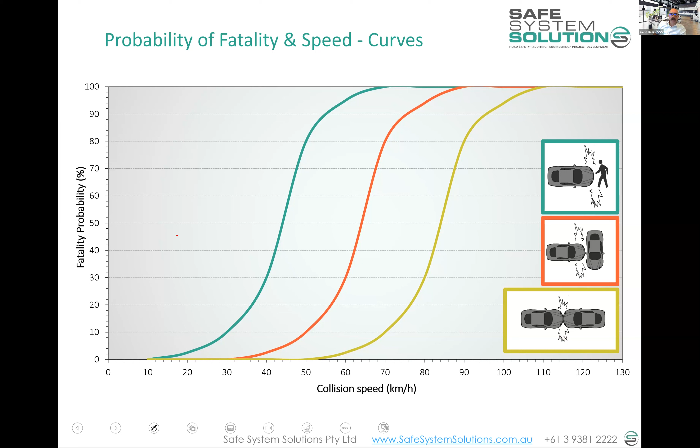And in terms of the severity of injury, the outcome, exposure, likelihood, and its severity, we look at these biomechanics of injury curves at different speeds. We got some good detail around that. We talked about that 10% line as a sort of threshold way of thinking. But I did point you at this, and I'll be pointing you at this again: the severity scoring guidance sheet, generally giving you guidance on how severe an outcome we might expect from a crash between specific road users at specific speeds, bullet vehicle speeds.

And that's what we generally feel. It is very much a graded, shaded thing, because it's not like a very distinct line that you would say, oh, no, it's ticked over that line. It's very much going to be a serious injury or the like. Some will be serious injury, some will be minor injury, some will be fatal. But we know this is a general gauge for what we're expecting. And so we'll be coming back to use this when we go to score the severity of crashes.

Okay, so how do we actually do this safe system assessment?

A little bit of a spot poll just to see where this group is at with safe system assessing. I don't know, Loretta, if you want me to pop that up, or you've got that there? I can, if you pop it on. I haven't got that one ready to go. That's all right, we are in module 3 or 4, I think 4. Here we go, launching that.

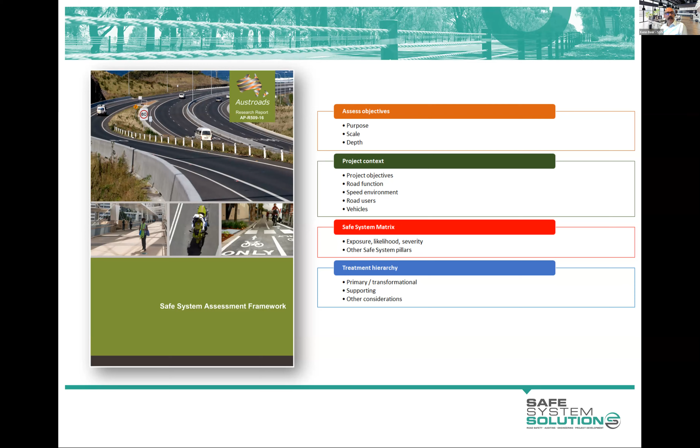But since the Austroads Safe System Assessment Framework was released, the jurisdictions started doing safe system assessments, and people were out there doing them.

They were finding a few little things in the Austroads guidance document that didn't quite work, for one reason or another. That's understandable, because when Austroads released that, nobody had really been doing any of these. So the jurisdictions created supplements or their own guidelines that reference back to the Austroads guide. Victoria's released one, South Australia's released one, and that one over here is the New Zealand Safe System Audit Guidelines.

They've combined safe system assessments and road safety audits into one methodology. So what I'll be talking you through today is the way that industry practices safe system assessments. It's almost exactly what's in the Austroads document, however there are a couple of little bits that are maybe a little bit different.

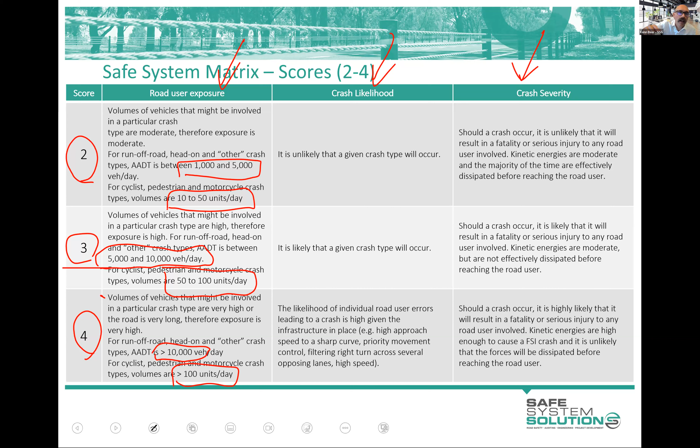Okay, that was the one. We said it was 3,000 vehicles a day. 3,000 sits between 1,000 and 5,000. So let's go back here. And what would we say? A 2. So we're able to put a 2 in there.

Now we've got a question that's come in: do we consider number of lanes while we're scoring exposure? Well, the answer to that is no.

The number of lanes will have an influence on the volume of vehicles going through an area, but the volume of vehicles is the AADT. It could all be crammed into one lane, or it could be spread out over 2 or 3 lanes. Actually, the number of lanes, in the sense of our accounting, will influence the likelihood of crashes, because you have more conflict points, more weaving, more potential likelihood of different crash types associated with that.

So, I hope that answers that. But really, exposure you keep simple. It's volume.

Glenn's asked a question, which is one of those little things I mentioned where Austroads documentation and the way jurisdictions have played it out in their guidance and industry practices is slightly different. It's around the length of the section of road. You don't actually account for length of section of road when you're doing a safe system assessment from any perspective. So they initially put that in, but it doesn't quite make sense as an exposure mechanism.

And we say the same for cyclists. How many cyclists are going to be going through there? Now, people might say to me, oh, on Sunday morning there's a pack of cyclists that go through there, about 20 of them. So how do I account for that? Well, I don't account for that in this matrix, particularly in a safe system assessment. I put that into another section of the whole safe system assessment, asking more qualitative questions rather than trying to quantify specifics, because that throws out your whole way of thinking about this intersection. It's important and we've got to factor that into our decision making, but this is really about your AADT style thinking of cyclists. So maybe there's only a couple of cyclists you expect going through there, commuter style cyclists, so maybe less than 10 units a day. So we're going to go a 1 for cyclists.

And then motorcyclists. A little rule of thumb, you could use 1% of AADT for motorcyclists if you're not given any good information. 1 to 2% is a reasonable way to think of it, unless it's a popular motorcycle route that you're aware of. But 1% usually is good. So what's that, 30? So 30 motorcyclists going through there, and we can go back to here - well, more than that, and again that'd sit in a 2.

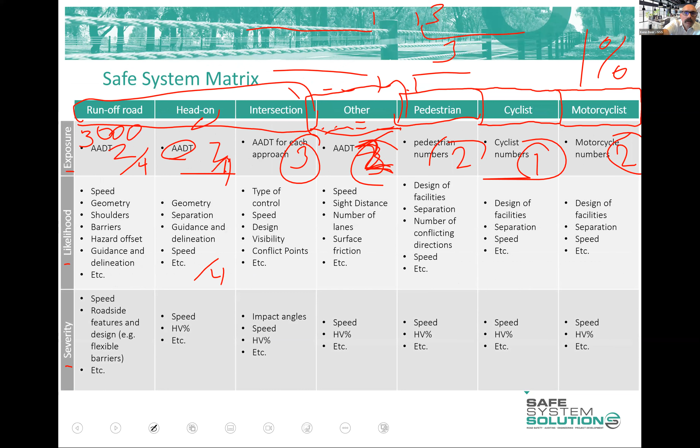Then you go to the intersection and do the same thing. You think about your intersection controls. You're asking, is this a give way type intersection, a stop sign type, or do we have a roundabout, or traffic signals? What's the type of control at this intersection? How fast are vehicles going through it?

And what's the design of it? Have we got a straight through, see-through effect happening? Have we got a strange skewed intersection design? Have we got other features? Is it obvious there's an intersection coming up? Can we see it well? Has it got good warning of it? How many conflict points are we talking about? Have we restricted some movements, lessened the chance of a crash by lessening the number of conflict points, the number of movements? And again, the list goes on.

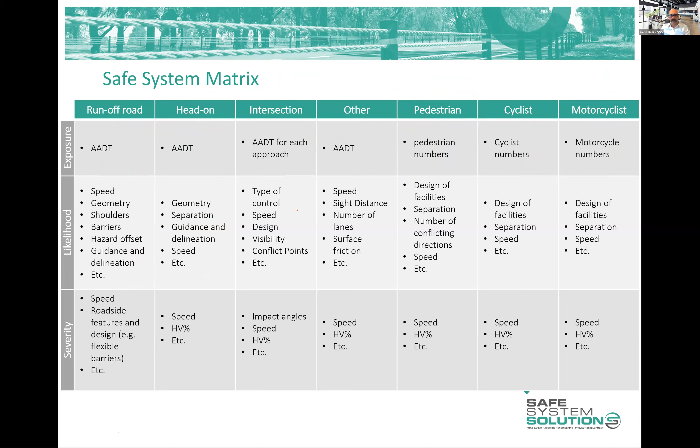Is it well lit? Are warning signs faded, or have we got things blocking views? Have we got sightline impediments? You keep working through all of these different things, jotting them down, and you come up with a decision of your choice: it's unlikely, it's likely, it's highly likely, whatever you're deciding.

We do have a question here, Ken, from Ellen. Do you think about how often a crash type, run-off-road or head-on, may happen when scoring the likelihood? Yeah, that's a really good question about whether we could use crash history to help us get more clarity around the scoring. The answer really comes down to the fact that crash history will, or should, align with the product of exposure, likelihood, and somewhat severity.

So you might be able to gauge a bit of an indication from that. But I caution people against using crash history data, because you can certainly get high safe system scores, bad alignment with safe system principles, that hasn't got a crash history. The fundamental risk is there, it may not have played out yet as crashes. More often than not, if you have somewhere with high exposure, your likelihood and severity will play out and it generally aligns with crash history. But just be a little bit cautious about immediately jumping to that as the way to work out these numbers.

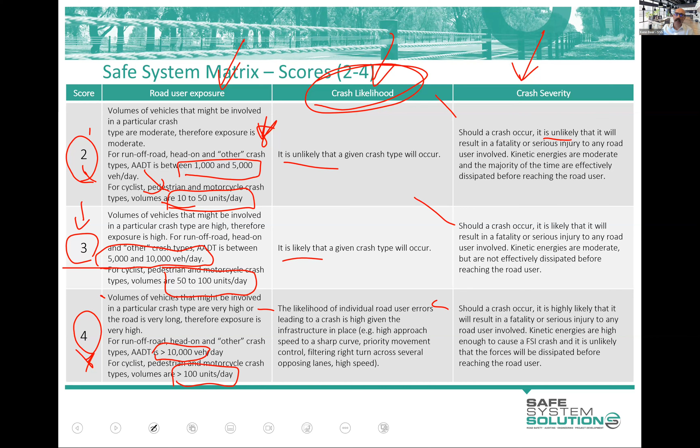A 3 means should a crash occur, it is likely that it will result in fatality or serious injury. A 2 means it's unlikely to result in a fatality or serious injury.

We're going to use this as a bit of assistance. So you can see why we had a 4 and got a 0 down here, and you'll be trying to work out where it might fit based on the crash you're expecting, pedestrian versus car. You might say, I think it's going to happen around the 40 km/h mark, so somewhere in this general range, maybe a 3 or 2. That's how you use this. It's a general indication only, and you need to make judgment on a number of factors, but it should help you.

So you're thinking about speed in all of them. Speed is so influential on severity of crashes, but also factor in, for run-off road, are there barriers? We know if they're going to hit them, that redirects and dissipates the energy over time. Maybe factor in how many heavy vehicles we've got. If we've got head-on crashes and lots of heavy vehicles, one of those hitting is a more serious event because there's more mass, and that's in our energy equation. At an intersection, we'd be thinking about vehicles crashing at different angles.

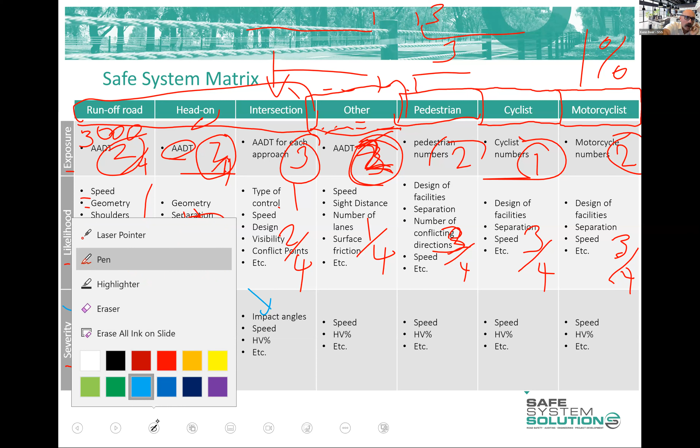So you then start to put in your scores on what this crash outcome is going to be. Maybe a 3 there because we're saying it's going to be bad - we've got this 9 meters to the trees, but when they get to those and hit a tree, it's going to be pretty bad. They'll wash off some speed as they do that, but it's going to be bad. That maybe could be a 4, but let's put a 3 on that.

For other or sideswipe crashes, we're going to say, actually I think we're okay on sideswipe crashes - they're not severe crashes, so that's down. Pedestrians struck at these speeds, it's going to be very bad, bad, and bad. I've gone through that quite quickly. You're going to spend more time justifying these scores with dot points about what you saw, what you thought about, and then you get to these scores.

And then what you do is multiply down, and you're able to get scores for each of these. Now the scores are out of 64, and it gives you that immediate indication. So 24, and where do we go? That's 24 as well. And this one was a, what do we say, 2.

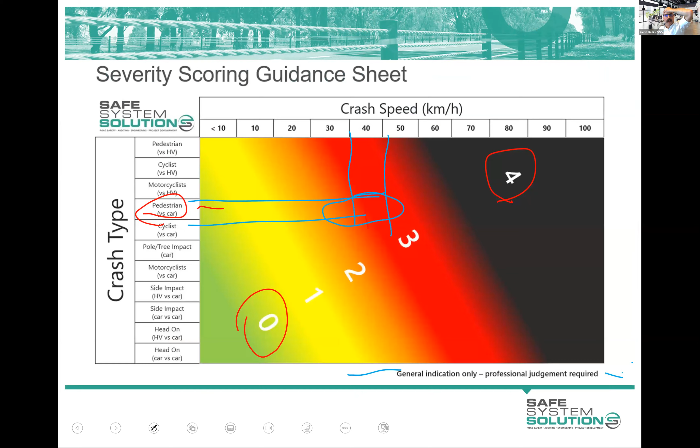I'll take any questions on that, and then it might be a good point for us to pause for our little break, and then I'll show you one played through. I don't see any immediate questions coming in.

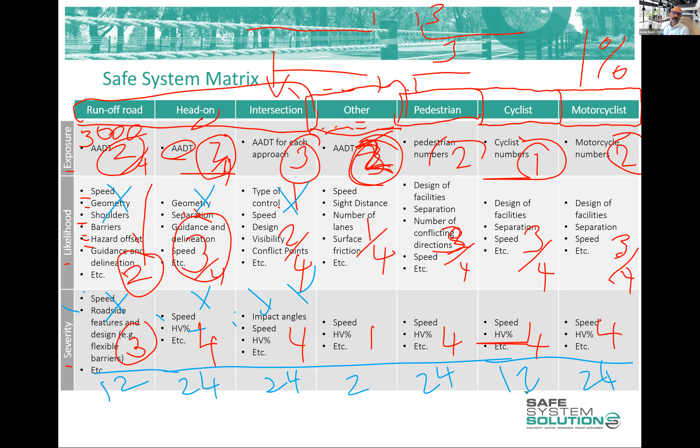Okay, so we've got to a point where we're able to get these numbers, and I'm going to keep ticking along here.

Let's see a bit of an example of one played out. This is a bit pared back and simplified just to keep us able to do it within these training sessions. I can show you maybe a real live one with more detail later. But here we go.

We've got an intersection. It's got give way control, a sort of T intersection, in its existing arrangement. And then there's a proposal or a plan to put a roundabout there, that's one thing they're thinking about.

Another thing they're thinking about doing is a modified T intersection with traffic signals, as you can see in the design there. And the third idea they've got is a conventional T intersection with traffic signals, with some slip lanes and other bits and pieces.

So what you do when you're doing a safe system assessment is, first of all, you look at the existing road environment. What's there as it is now? You go out and look at the site and say, okay, there's the intersection, it's got reasonable sight distances.

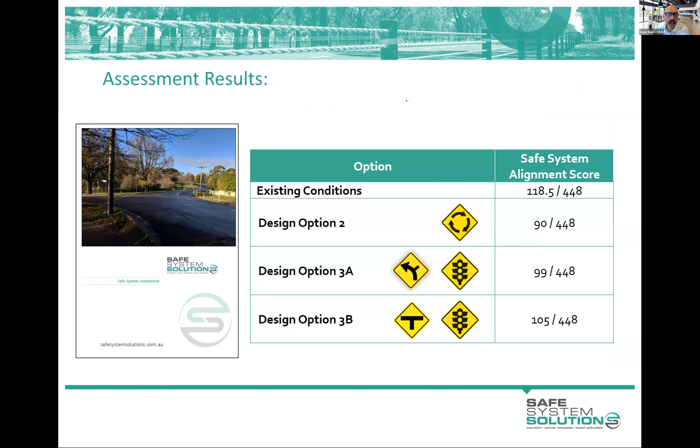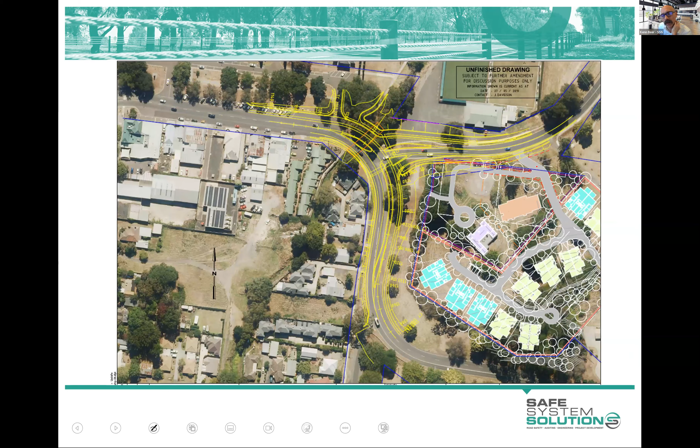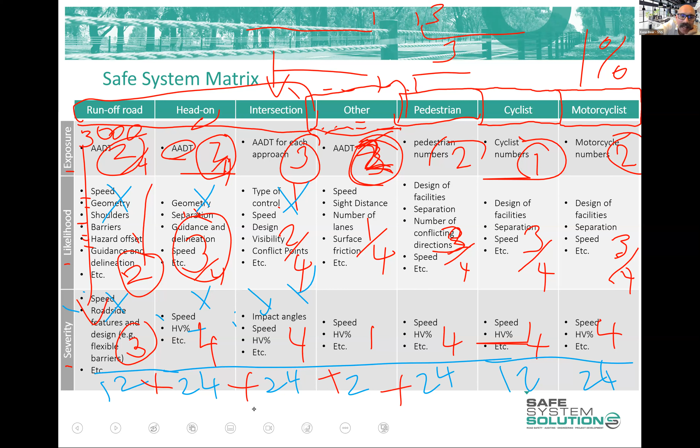And you're able to get to a point where you could produce total scores if you wanted. So you could say for this one, the existing conditions was 118.5 out of 448. 448, I should mention, is the addition of all of these — so down the bottom, you add them. You multiply down and add across, and you can get a total out of 448.

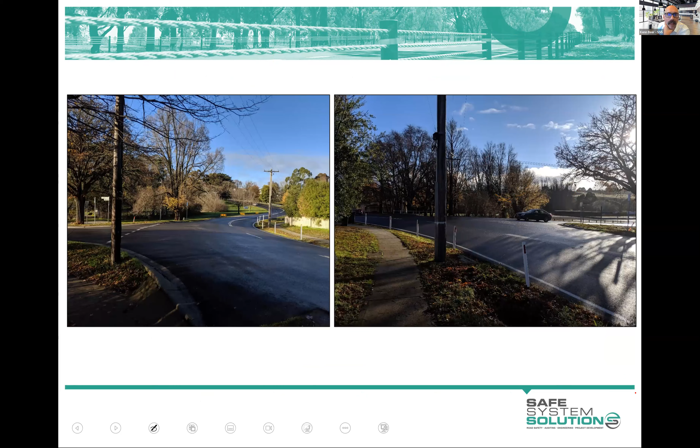So your total score out of 448 for the existing conditions was 118.5. For the roundabout option, it went down to 90. For the modified T intersection with signals, it was 99. For the conventional T intersection, it was 105. So what that says at a very high level is that every one of those proposed changes, the different design options they had there, will improve alignment with safe system principles. The roundabout is going to give us the most alignment with safe system principles.

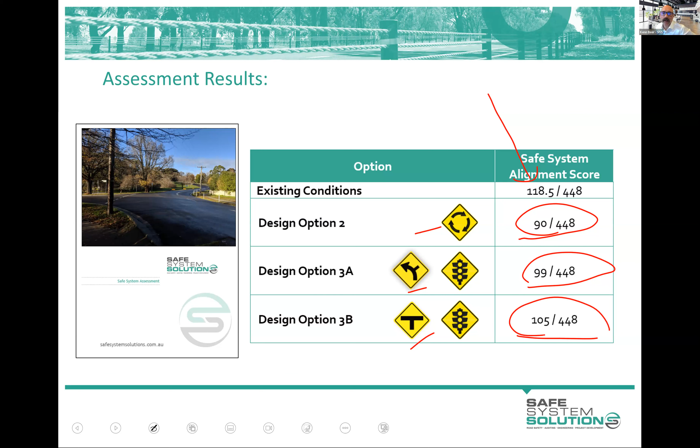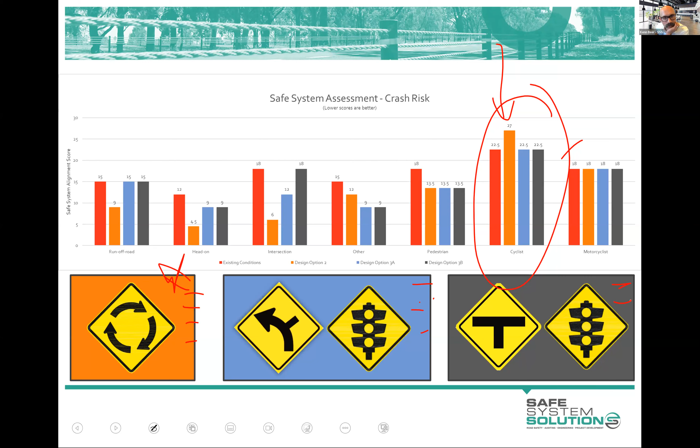So when you make recommendations for things to consider adding or changing or adapting in their designs, we categorize those into primary or supporting. This is probably one of the more challenging things, and might be something you get feedback on from the assessors. But first, think about these as buckets or bags of treatments. There's a whole lot of things we think of as supporting treatments, and a whole lot of things we think of as primary.

Ken, we've lost you. If you can hear me, we have lost you. You've just frozen on us. Sorry everyone, some technical difficulties. Thanks for your patience. Maybe Ken might log out and log back in. Sorry about that, hopefully not too long. Unfortunately I can't continue on with the learning. I have no idea, so sorry about that. Won't be too long.

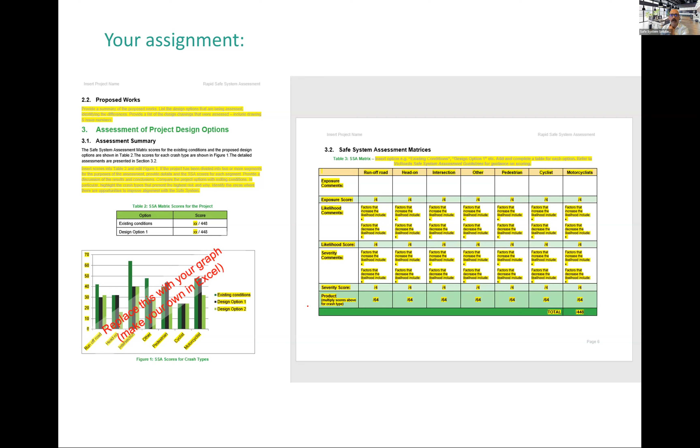You're going to be given this Word document. It will have highlighted sections in yellow, which you're all going to fill out, and some crossed out sections that you won't need to fill out.

Before this, we are going to ask you to go to a site. We've created or collected designs for upgrades in your area, somewhere close to the address you gave us. You'll get that design, go out there, look at the existing conditions of the site, then look at the design and imagine it built.

But when you go out there, the purpose is to look at that area through the safe system lens, thinking about exposure, likelihood and severity, a bit like you did with the Module 2 assignment, particularly thinking about these crash types in the matrix and all these road users.

Now, each of the sites we've looked at, we've risk assessed, and they're very safe from that occupational health and safety perspective, as long as there are areas to stand back from the road, to just observe, and to park safely.

We don't want you to be a hazard to other road users, and you can certainly do this all very safely. We want you to wear a high visibility vest just because it's a work assignment, I suppose, and the like.

And we want you to stay off the road. There's no need to measure lane widths or really spend a lot of time out there looking at the crossfall of the road or anything like that.

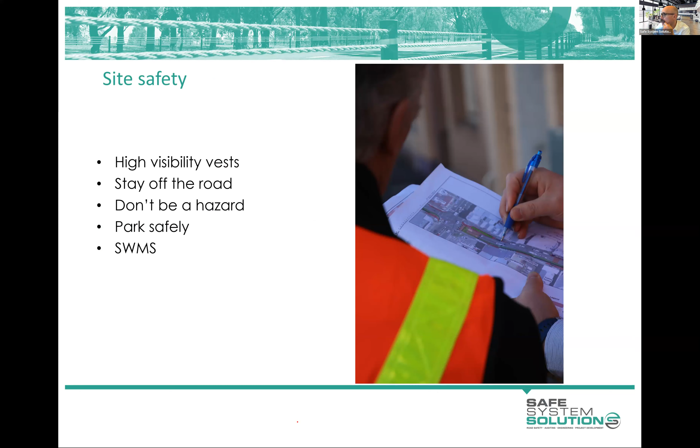Okay, so I think you'll probably have a few questions and need some clarity after we show you exactly how to get this out of the learning management system. But Loretta, I'll hand over to you now.

If you want to grab control and show them where it is in the learning management system. Yep, will do. Can you see my screen now, Ken? Yes, we've got the LMS there, looking good.

Perfect, thank you. Okay, well, I'm sure you've all been in here already. Well, I hope so, if not, here it is again. So going to the tile of the module for today's module, which is module 4, and clicking on there, you'll see a list of things here. So firstly, you do need to complete the quiz, clicking on there and click on attempt quiz and follow through those questions.

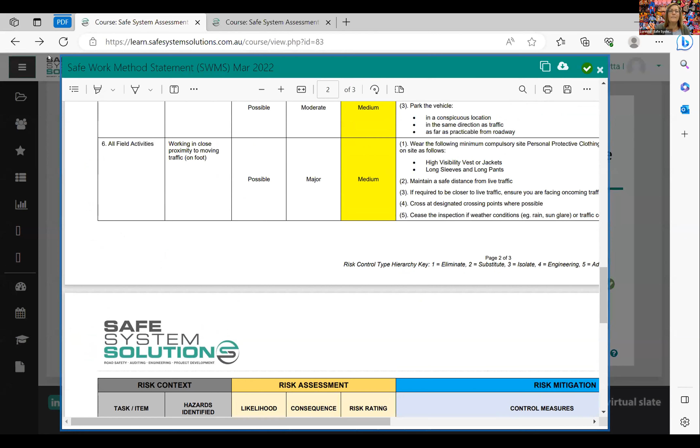There's the safe work method statement that Ken mentioned earlier as well. Just ensure you click on there and have a read through to ensure you understand all the safety behind it. Then you'll see a little tick pop up because you've read that.

Similar to this one, although it's set up as a quiz, we need to ensure you're following that safe work method and agree to it. So click on attempt quiz now and follow through those questions. It's not an actual quiz, but ensuring that you agree.

Going back one step, that's where we click on to complete your site visit or assessment. Once you click here, you'll see a list of PDF documents with your name. Find your PDF with your name - you might have multiple names there, which might mean you're in a similar location near your workplace. Once you click on there, the PDF pops up, you open the file, and it'll show you the actual site for your assessment.

Going back, you'll see the template, and Ken will run through this. Clicking on that template brings up the Word document as well as the graph. I'll bring up the template quickly so you can see what you need to fill out in all of those highlighted sections that Ken will run through now.

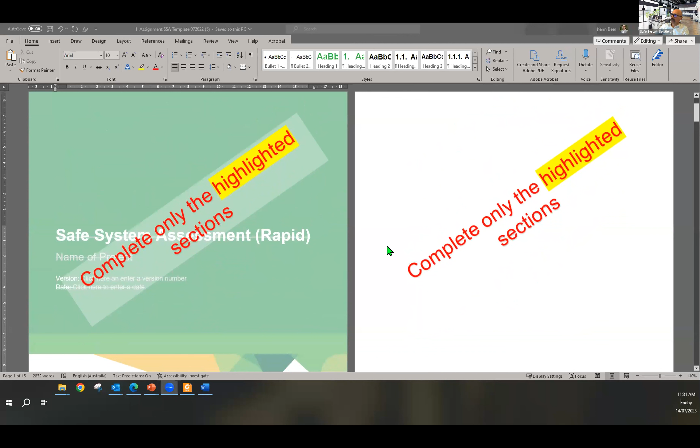Good, okay. So you've downloaded the Word document and you'll see it says complete only the highlighted sections. This is the Victorian government's template for safe system assessment. You could reuse it again as you'd like. Complete only the highlighted sections.

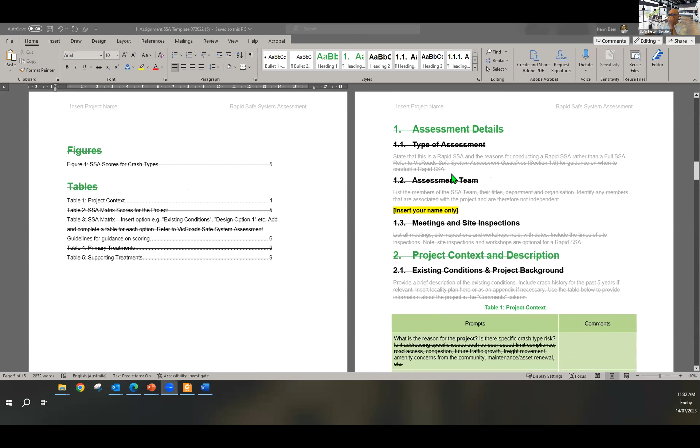You can see there we've crossed out some stuff. We don't want you to write an executive summary - that's extra time, we don't need you to spend on that. You don't even need to update the table of contents or the table of figures or anything like that. You don't need to give us information here, but what we do need you to do is insert your name, put your name in.

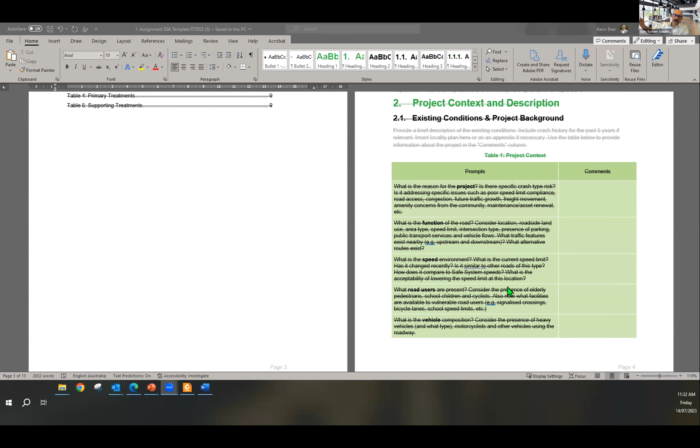Don't need to do the project background and context - in fact you would want to do this obviously for a real safe system assessment, but this is a mock one. You're just sort of assessing what's there and making some assumptions on maybe why they're doing things, and that's okay.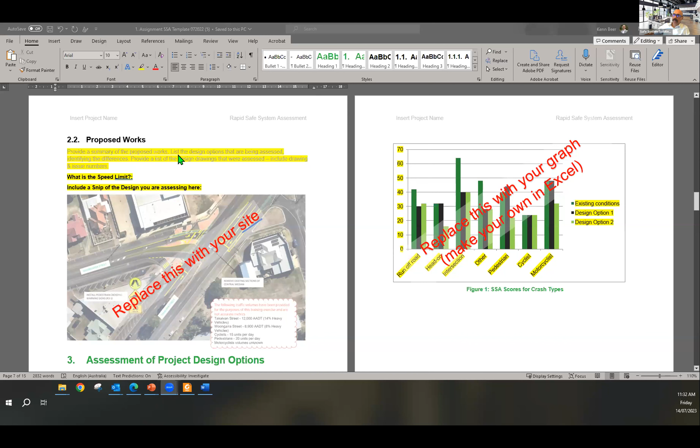You will provide a very brief description of the project they're planning. So you saw the one Loretta showed - you'll have a look at it and say, okay, they're proposing a signalisation of this intersection, and the speed limit is 80 kilometres an hour. I'm going to take a snip of the design and plonk it in here. You'll see for each of the designs there are these fabricated traffic volumes.

We want you to use those traffic volumes, even if you look at it and think, I know that site and that's not the right traffic volume - use this, because part of our assessment is that you've got the correct ability to translate AADTs to safe system assessment scores for pedestrians, cyclists and motorcyclists. You might need to think back to what I said about 1% of AADT generally.

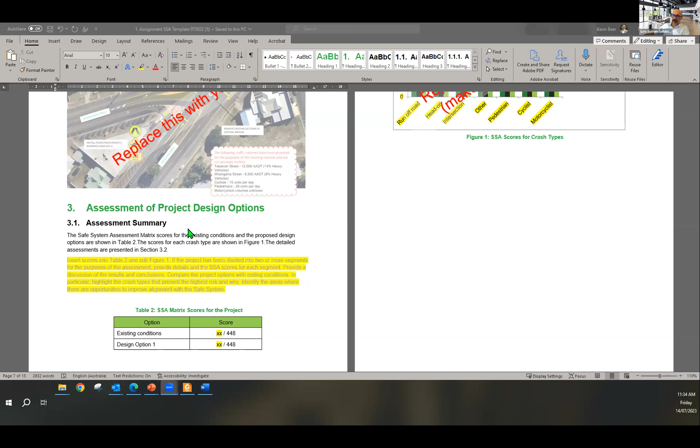So that gives you a little bit of, okay, that's the proposed work - you plonk that in there. Section 3 here is a summary of the outcomes of the assessment. You're going to have to do that at the end because you haven't done your assessment yet. And you're going to put a graph in there as well, but you can't produce your graph until you get some scores.

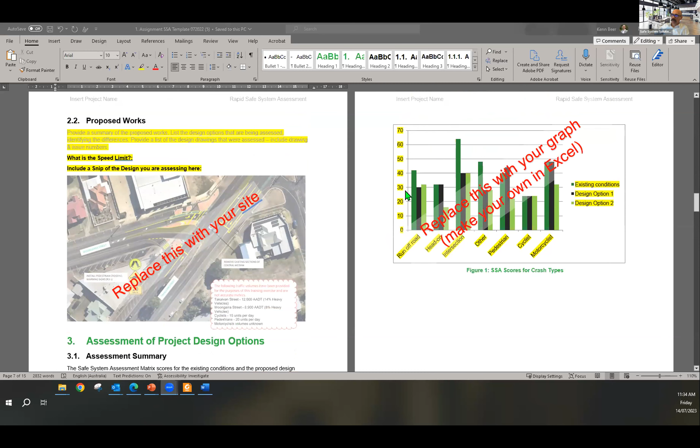So this is where you're going to spend a good bit of time. The table here is the existing conditions. We're going to leave the design one blank, okay?

So you're going to get in there and write a little bit of info, then put a score here. Write a little bit of info here, put a score here, and continue on. This is the existing conditions, 3, or whatever it is that you come to.

So you're doing all of this for existing conditions. Then you write some factors in here, and you expect to be putting a few in, not just 1 or 2, a good few of these. You're putting your score there for the existing conditions, and so on and so on. You fill all of that out. Do more here, and you get the picture, I'm sure.

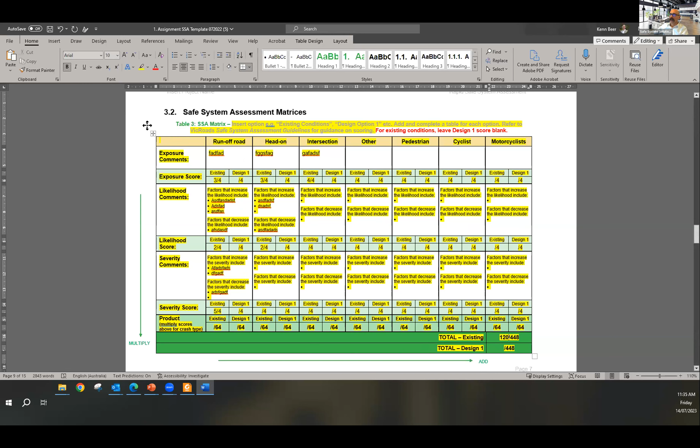And now maybe you want to put your highlights on that, maybe just to make it look a little easier. And then you're going to copy that and you're going to go down.

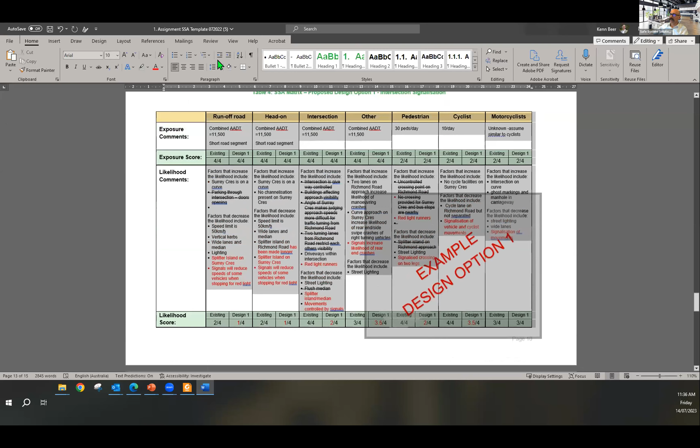Oh, here's an example, actually. Here's one filled out earlier, so you've got a good idea. You can delete the example if you want, but let's delete these examples. Examples are there to help you see what it should be looking like.

And then, having copied the existing matrix, you're going to paste it, and then start to change it where you think it's needed, and put in your new scores here. 3, 3, 4. That's all the same.

Then you go, oh well, those two get removed because they're not there anymore. That one's still there, and there's this new one here, so I better make that one red because that's new, and I'm going to give it a score of 1 now because it's better, and let's make that red so it stands out.

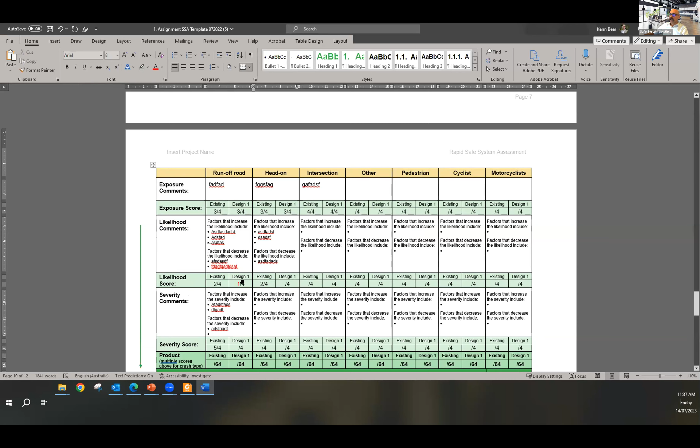So you'll continue to do that for all of them. Get your final new score, which is 180, so things have got worse under this design. Make that red.

And then you come down here and say, right, I've done all that assessment. I assessed what they were planning to build, and I've got these ideas that would improve things. And I'm going to write them in here. So I've got that's my first idea, that's my second idea, and then my third idea. And I've got a couple of ideas that are actually supporting treatments.

So those ones were primary treatments. These ones are supporting treatments. I'll show you those a bit later. And off we go. So we're doing well.

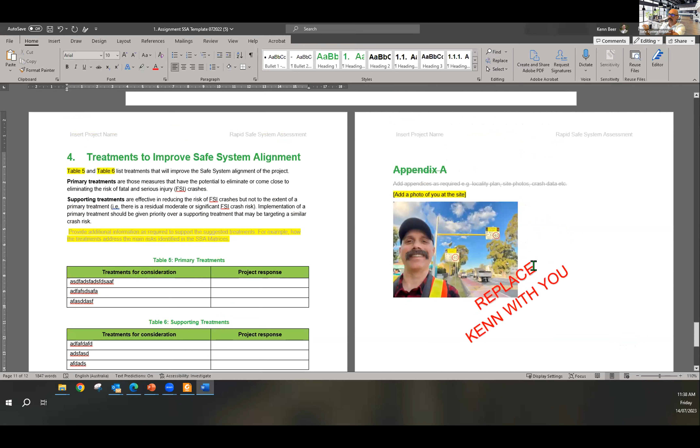Now you might want to put a few ideas and things in there if you want. And then over here, you're going to prove to us that you went to the site. So it's going to be a selfie or something of you there on the site with a high-vis vest on. So replace me with you. So you're going to go through and do all of that.

Now, to make your life a little bit easier, actually, I'm going to go here before I go. Yeah, make your life a little bit easier. We've got this Excel graph generator.

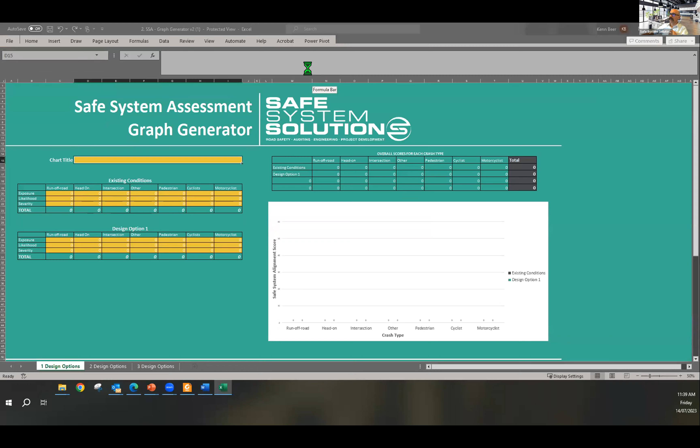Now, you being super smart people would be able to whip this up in 2 minutes, no doubt yourself. But just to make your life a little bit easier, you can put your existing condition scores in after you've gone through and scored it in the Word document. And you can see it starts to spit out a graph.

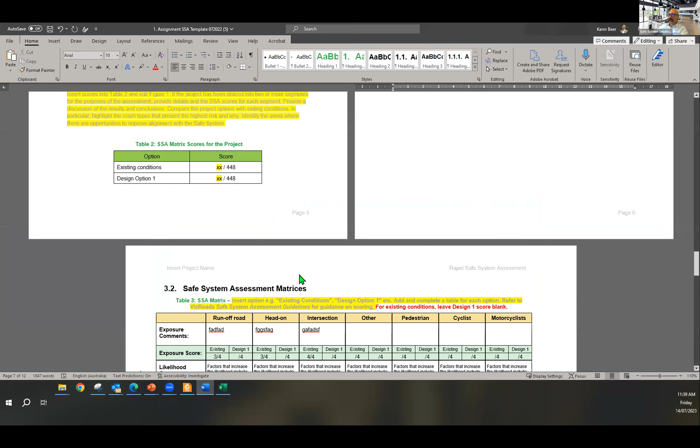And then you'll have a design option, and you can see it comes in there as well. So you're then able to get that, either snip it or copy the thing and then bring it back in and back up here, replace yours with that one. There it is. And that's all very nice. Gives you a nice graph there.

So back here, if we go to the resources folder, which is in the documents, the resource documents, we've got the Safe System Assessment document from Austroads. So that's that one.

AP-R509-16, Safe System Assessment Framework. You can download that document, and within it, if you go down a few pages,

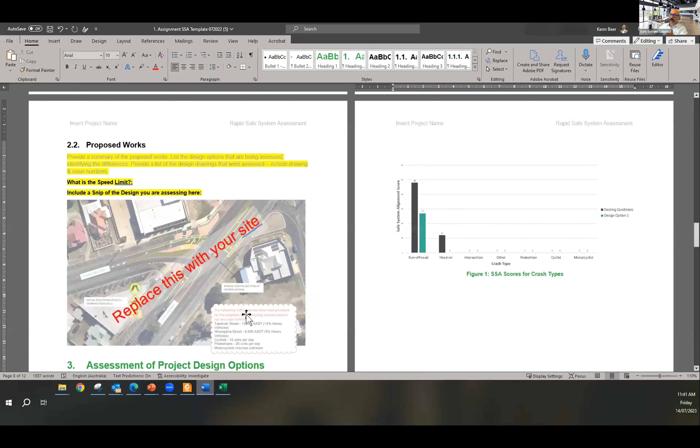Back in here, when you make recommendations, we would like you to put in some primary treatments. Technically you don't need to, it could just be all supporting treatments, but we really would like you to push for some primary treatments there.

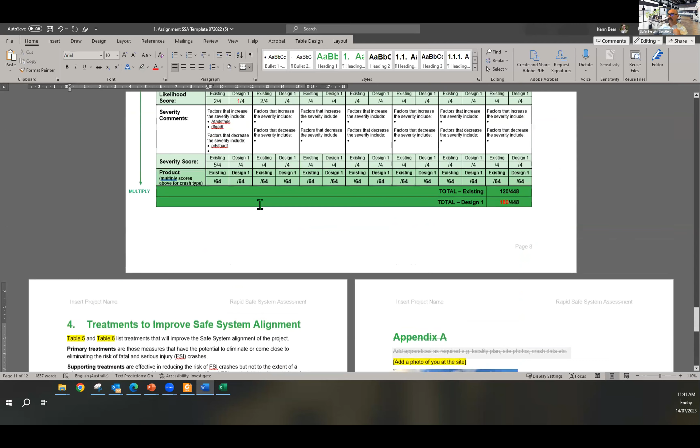So once you've done all of that, you'll hit save, PDF the thing if you can - that just makes our life easier - and jump back in here, go to the module, and this is in the grading mode. You'll upload it just the way you did with your module 2 assignment - add submission and drop it in there, then hit upload.

You can see here we've got 14 days and 7 hours, that clock is ticking. Due date is the 28th at 7pm. That should give you plenty of time - maybe a couple of hours to pull it all together and do some good thinking. If you're having trouble or struggling, or don't understand aspects of it, get in contact.

We can certainly set up a one-on-one meeting with you. If you're just absolutely unable to meet that - though you might need some time management in your life if you can't find 2 hours within 14 days and 7 hours to do this - but if life has gone crazy, get in contact with Loretta, just reply to the training team email and explain, and they'll look to provide extensions as appropriate.